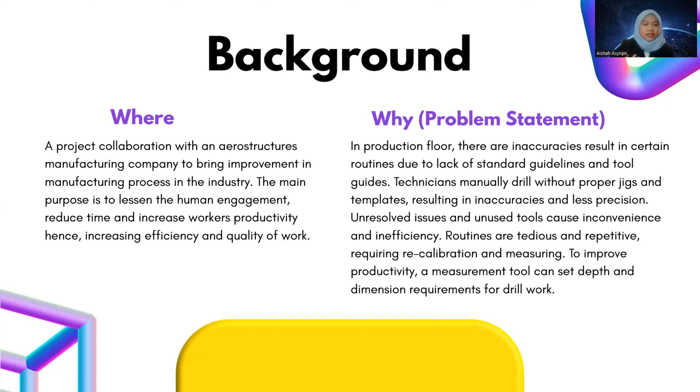The problem arises when, on the production floor, there are inaccuracies in certain routines due to the lack of standard guidelines and tool guides being reinforced. Technicians manually drill without proper jigs and templates, resulting in more inaccuracy and less precision in the product. There are many unresolved issues and unused tools that cause inconvenience and inefficiency. The routines are tedious and repetitive, requiring recalibrating and remeasuring every time. To improve productivity, a measurement tool can set an improvement to the technician's work and agility of product.

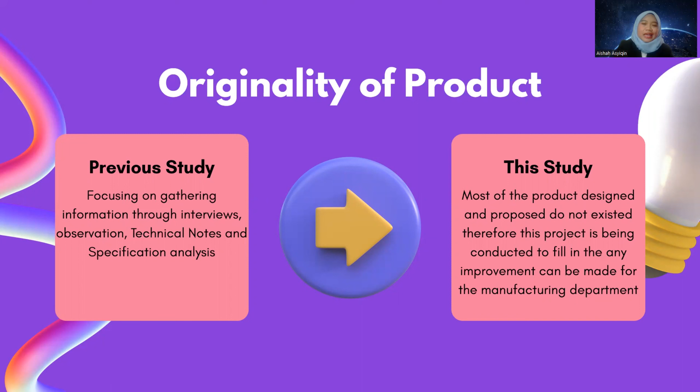From my previous study, I focused on gathering information through interviews with experts. I made observations at the workplace and analysis through technical notes and specifications given by Boeing and Airbus. In this current study, most of the product designs I propose still do not exist on the manufacturing floor. Therefore, this project is being conducted to fill in any improvements that can be made for the manufacturing department.

The objective of my project is to analyze repetitive issues on the production floor using qualitative methods, to study work processes and requirements for solving the issue, and also to design solutions for working routine improvement and efficiency in the production floor, such as testing tools and tolerance tools and many other improvement activities.

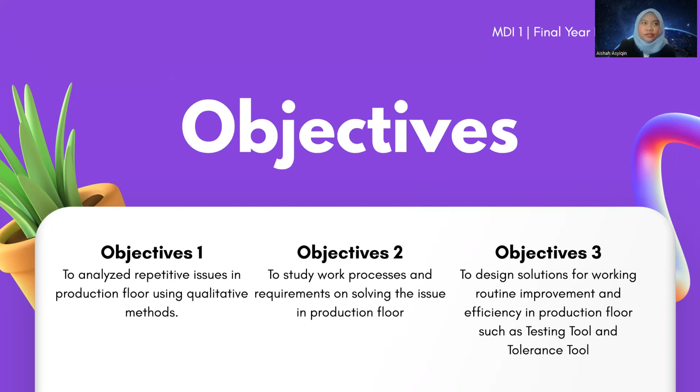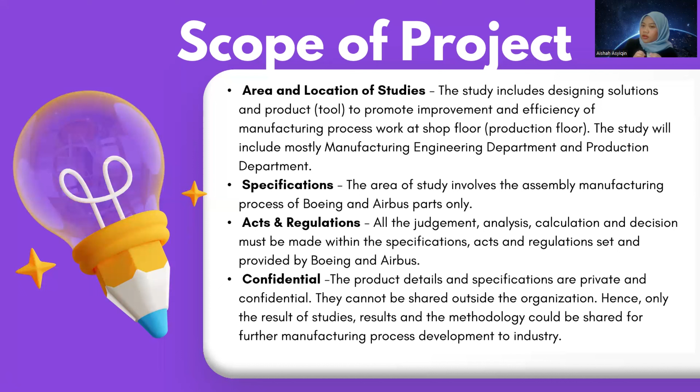Limitations in my project: first, in terms of area, the study will mostly include the manufacturing, engineering, and production departments. In terms of specification, the area of study and the product are private and confidential; they cannot be displayed outside the organization, as that would cause the organization to be known.

The organization will benefit by not having to spend a lot of money on new parts or materials to redo work. In terms of economy, by increasing work productivity, it will reduce the time of activities so workers can manage workload effectively, improving sales and the company's recognition. For the social aspect, resolving all the issues will gain the workers' confidence in using the method to work efficiently, prioritizing towards zero defects in productivity.

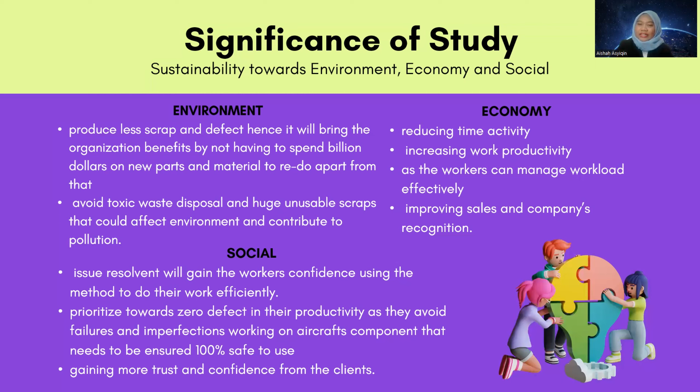For my methodology, I mostly use qualitative methods, and the pictures show my activities during gathering while doing the project. By interviewing experts, I managed to hold several meetings with professional manufacturing engineers there, discussing theory and design. The second picture shows me analyzing the technical notes and specifications.

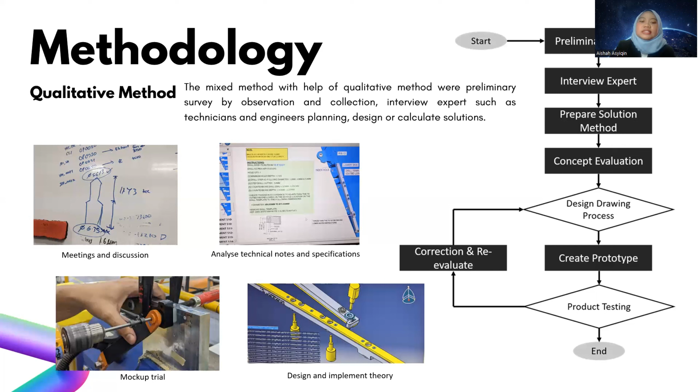I also do mock-up trials. After creating a prototype, I do mock-up trials with the technicians, and lastly, I implement the theory and design.

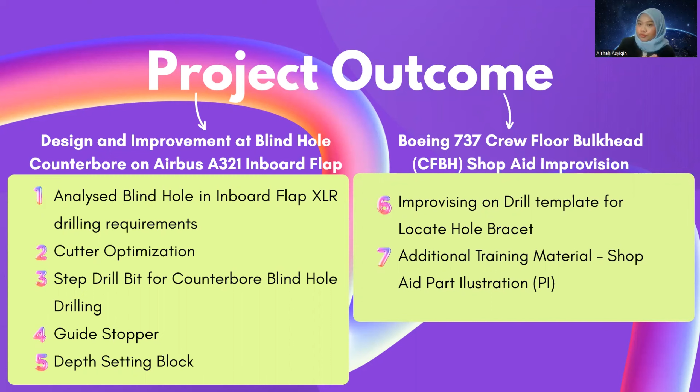This is the overall output of my project. I worked on two areas: one is the Airbus inboard flap, and the other is the Boeing crew floor bulkhead. The output I produced is mostly a proposed design improvement at the blind hole counterbore on the Airbus inboard flap.

Then I made a cutter optimization to reduce the step cutter used in the blind hole counterbore drilling. At the outboard lower, from 5 cutters, I managed to optimize it down to 3 cutters with a new cutter design. Before, there were many unnecessary step cutters being used. After the optimization, the step drill cutter reduced the time taken for the step drilling routine in the inboard flap counterbore hole.

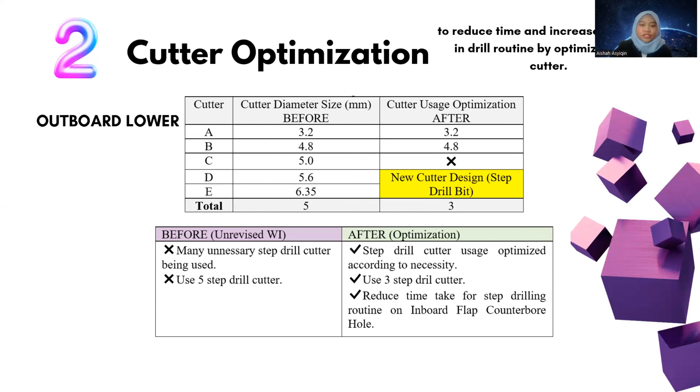Inboard lower, from 8 step cutter being used, I managed to optimize to 5 cutters only, including the new design. After the optimization, it will reduce the time taken for the step drill routine.

A step drill bit for counterbore blind hole drilling is proposed as a one-step cutter instead of using a reamer. Previously, technicians would drill the hole one by one, step by step. For instance, in inboard lower, they use 8 cutters, including reamers, cutter, and for the counterbore, they use only reamer.

The design that I made is actually combining the final hole cutter bit and also the reamer. So the cutter, they only have to use 2 cutters at one time. The step drill bit also includes as one of the cutter optimizations.

Why does all the cutter need to be optimized? The step drill is made to reduce the time consumption of using too many steps, but resulting in just that one hole.

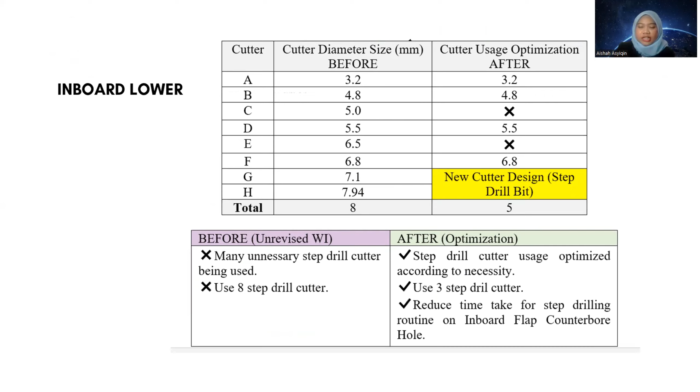Combined as one step drill bit, which I designed for the outboard lower and inboard lower.

So I actually improved their usage of the cutter. Aside from reducing time, it helps them drill in one hole. So this is the drawing for the outboard lower and inboard lower step drill bit.

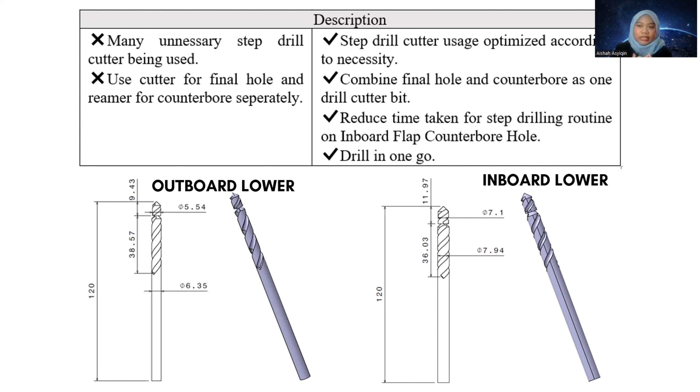Guide, which is a stopper. This is created to improve the drill work by replacing the masking tape and manual adjust drilling. Before, the technician used masking tape as a stopping guide, so it would result in inaccuracy.

The manual drilling would mess up their work momentum as they needed to drill slowly to stop at their masking tape stopper.

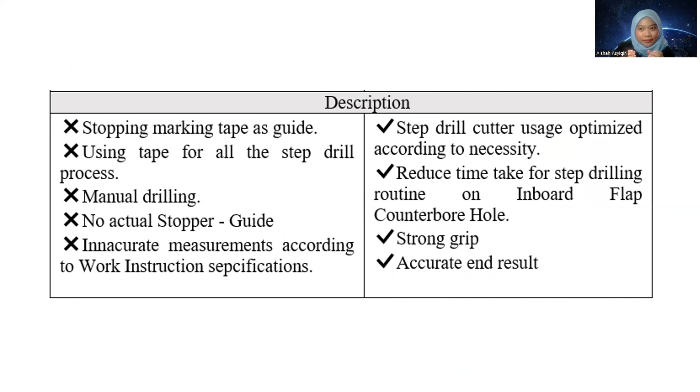And a new collar type guide stopper, which the mock looks like this, proves that when using this type of guide stopper, it will grip the drill bit and will not slip. So the drilling precision will go exactly like the one specified in the technical notes.

Next is the depth setting block. The idea and theory behind this setting block is that it acts like a gauge for the blind hole counterbore drilling on inboard flap.

To use it, I have the prototype that I made the other day. These two are the depth setting blocks. For example, this is the depth setting block, and this is the drill bit. So they don't have to recalibrate the drill bit using a vernier caliper.

For instance, they used to recalibrate all 8 cutters by using vernier caliper one by one for every drill routine. Now, with this block, for only the blind hole counterbore drilling, they don't have to recalibrate or remeasure using vernier caliper for all 8 cutters. They only need to use this block with the cutter.

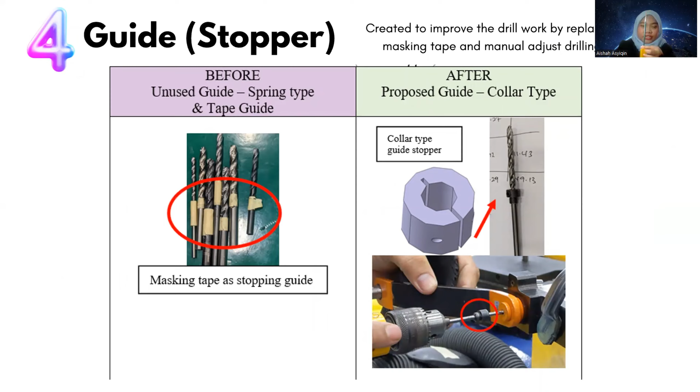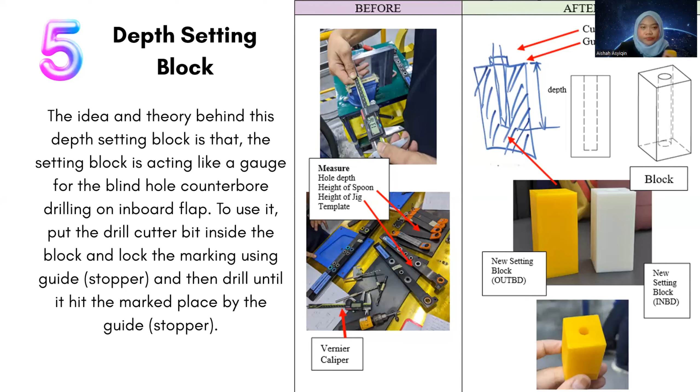The block requires the measurement of the hole depth, the height of spoon, and the height of jig template. The hole depth is as drawn in this hole depth.

The time taken for the measuring process using the vernier caliper takes about 30 minutes for the whole drilling process. So the technician would remeasure the depth and height requirement using the vernier caliper for each cutter bit one by one. It is very time consuming to remeasure all the 5 to 8 drill cutter bits.

After implementing this, the time taken for the measuring process shortened to only 5 minutes. It reduced the time for the drill routine, as technicians no longer have to measure all the jig template, the spoon, the depth, and recalibrate the mark on the cutter every time they do drill work. This saves a lot of time and increases efficiency in work productivity.

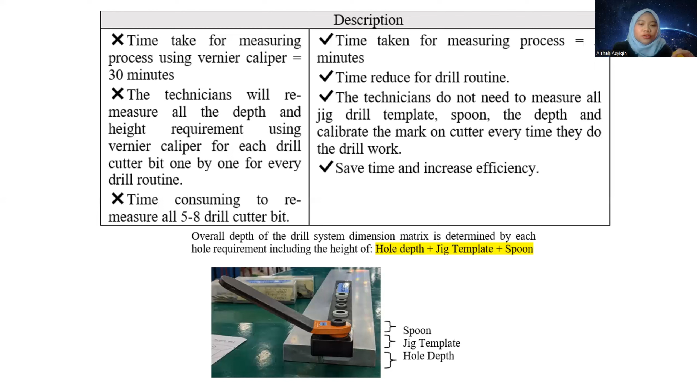This is the view of the hole depth, the jig template, and the spoon. These are the material selections for this product. There are a few options, but the technicians tend to prefer the acrylic clear and resin clear material types since they allow visibility inside. These two products have actually been registered at the company as official shop aids.

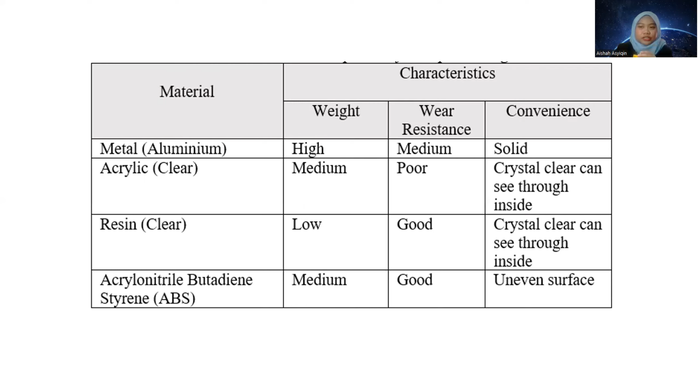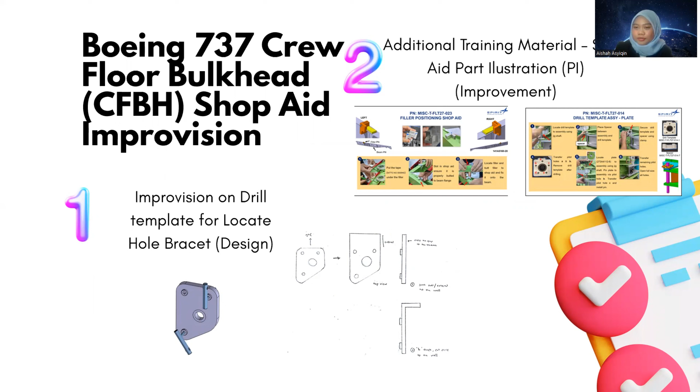The improvement made at the Boeing crew floor bulkhead: I made shop aid improvisations and proposed additional training material. For the drill template for locating the hole bracket, this one is actually a design.

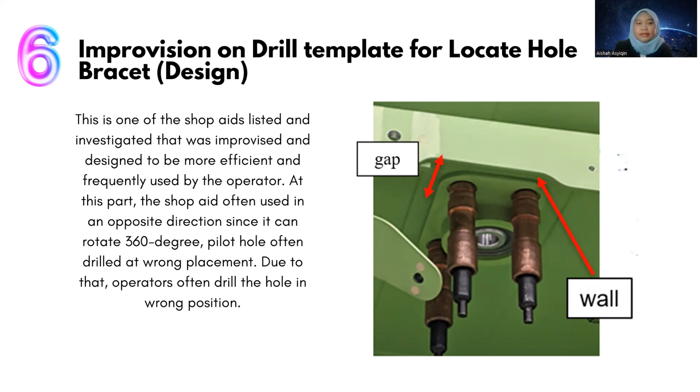Previously there were many unused shop aids due to inefficiency of usage and lack of knowledge among technicians on how to use them. At this area for locating the hole bracket, the shop aid had no border to guide it. So technicians didn't use this shop aid as often, because it could be rotated 360 degrees and they got confused about which hole was at which area, sometimes thinking a hole was over there or two holes at the back. As a result, the pilot hole was often drilled at the wrong placement.

So I proposed to extend the border of the guide and add a leg as a stopping guide. This way the shop aid won't be used in the wrong direction, as it's locked into its shape. This one is only a proposed design.

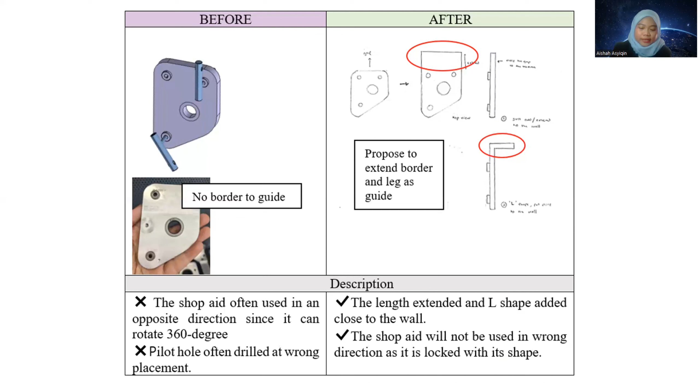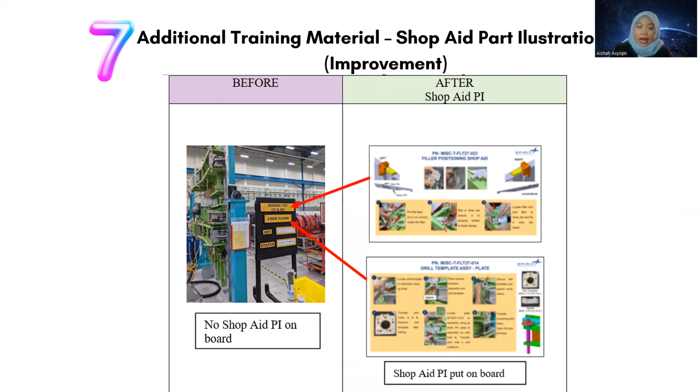Additional training material, called the shop aid part illustration. Previously there was no shop aid PI on the board, so I proposed this. The old technicians were having problems explaining one by one to new contract technicians, interns, and new technicians how to use the shop aid. By having an aiding poster, it helps the leader ease the process of explaining how to use it, since the shop aid was often not used due to the time consumption and lack of explanation.

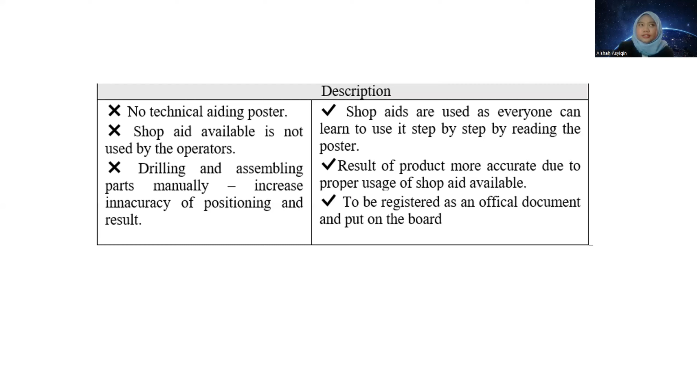Using the shop aid properly increases the accuracy of positioning and results in drilling and assembly parts. By proposing this, the shop aid will be used by everyone who can learn step by step by reading the poster, so the product result will be more accurate due to proper usage of the shop aid. This poster has been registered as an official document to be put on the board.

Here is the detail of the shop aid. The first poster I made is for the filler shop aid, and the second is for the drill template plate shop aid.

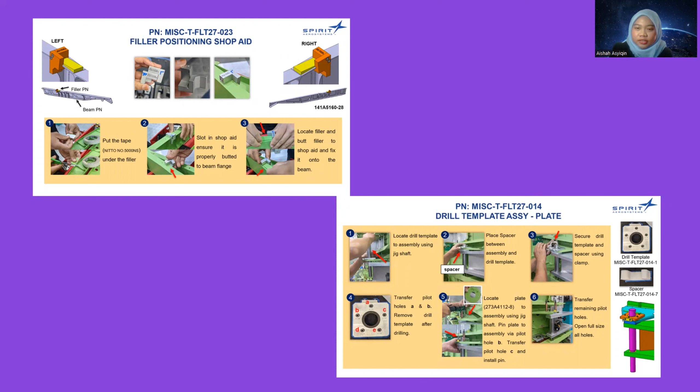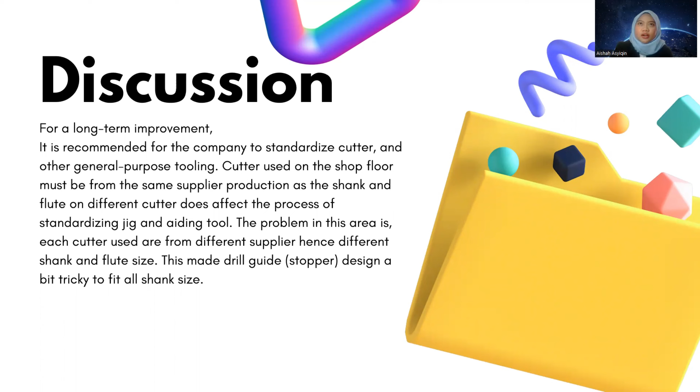For long-term improvement, it is recommended that the company standardize all cutters for other general purpose tooling. The cutter used on the shop floor must be the same as from the supplier production, since the shank and the flute on different cutters affect the process of standardizing jig and aiding tools. This was found when I interviewed the expert in the tool and jig department.

Thank you very much, Dr. Azianti, for staying with me for this long.